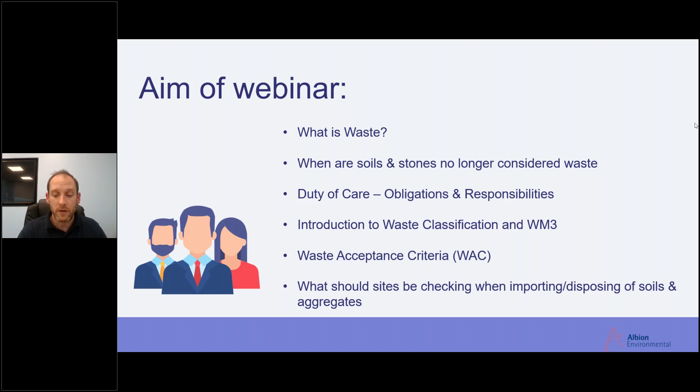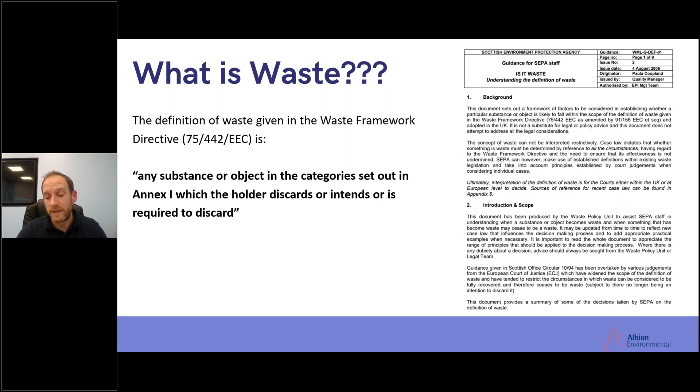So what is waste? If you're looking at the Waste Framework Directive, the definition is any substance or object in the categories set out in Annex 1, which the holder discards, intends to discard, or is required to discard. But quite simply, when we're looking at construction sites, if a groundwork contractor or developer needs to excavate material for cut and fill, for drainage, for foundation design, to get to formation level, and they can't incorporate it within the site so it needs to go off site, that material is going to be waste material.

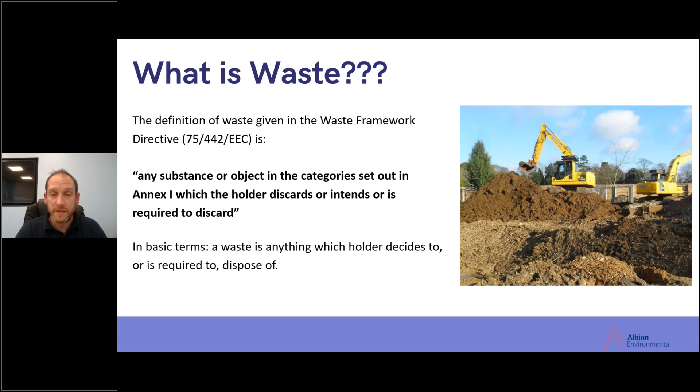So why might waste producers or those in industry think it's perhaps not waste? One reason we sometimes come across is people try to argue that the material's valuable - I've got some screened topsoil, for example, that's come off the site, and I know someone on another site who's crying out for this and would pay money for it.

There's value to it. Equally, you see waste contractors taking in mixed construction waste, or even just soils and stones, and then screening it and producing a screened topsoil. Again, they're looking at stockpiles of material and saying, well, it's got value to it, people are crying out for topsoil - why do I still have to consider it waste?

So we're going to touch on that. But I suppose while market demand might be one of the reasons why things aren't considered waste, it certainly wouldn't be the overall factor.

And whether it is non-polluting, or looks non-polluting - I say 'looks non-polluting' intentionally, because I've been involved on sites where, say, a demolition contractor has left a stockpile of demo material. It looks, to all intents and purposes, just like a pile of aggregate, and the contractor on that site or another site says, well, I can use that for my piling mat, it looks pretty clean. But again, that's not the overriding factor on whether something can be classed as waste or not.

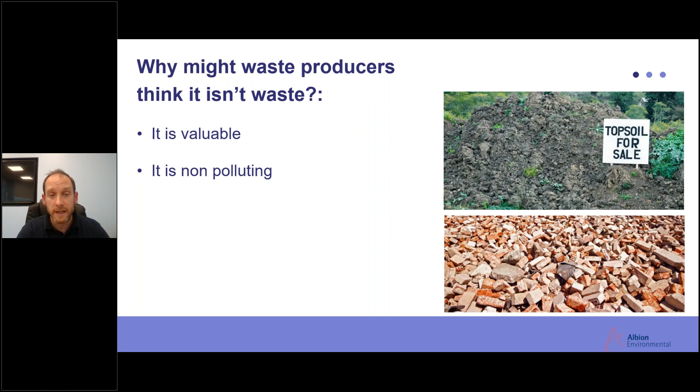Just because something looks non-polluting and there's value to it, doesn't mean that it's no longer considered waste. Even if that material, even if you're giving it on to someone else, or your client's giving it on to someone else, and they're going to reuse or recycle it, it's still legally considered to be waste. So if the person that produced it had to dispose of it, then that's still a waste material that you've passed on, and they are then handling.

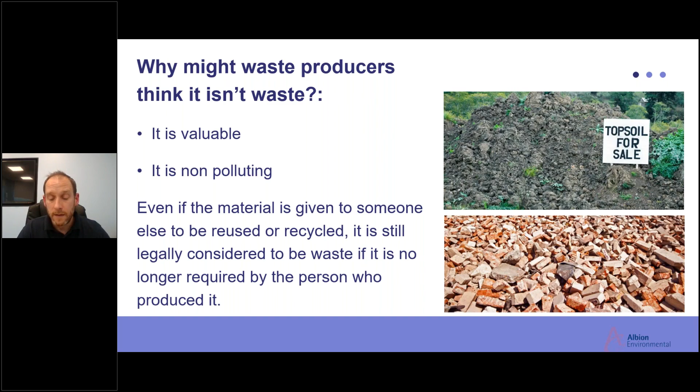So when would it no longer be considered waste? There are obviously examples of that. There's good aggregate and soil out there that we want to be reusing on developments.

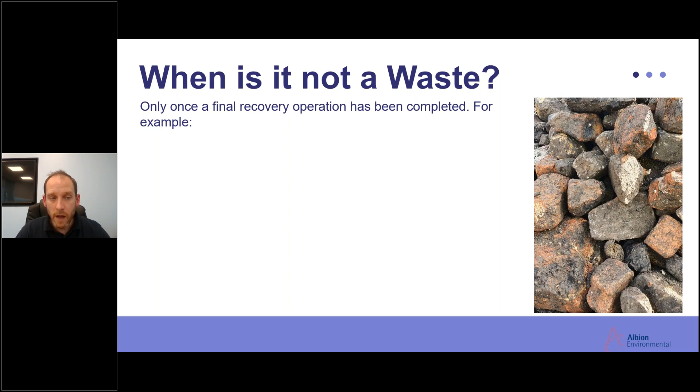The main definition really is once the final recovery operation has been completed. An example of that would be the aggregate protocol, which is the quality protocol for the production of aggregates from inert waste. So if that aggregate protocol is in place, if it's been developed for the site and produced to a particular standard - I've got a slide in a second that goes through that process in more detail - then it would no longer be considered waste.

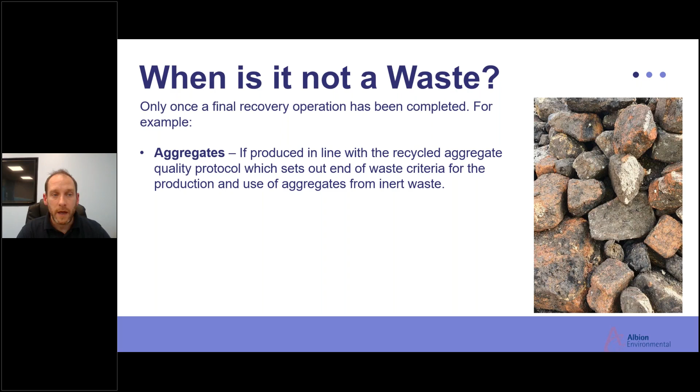And there are some other quality protocols out there, for example for compost as well. So there may be a quality protocol in place. There's also some other specific guidance, for example SEPA guidance on promoting the sustainable reuse of greenfield soils in construction. Again, if we're working on a greenfield site that's got a surplus of material that's been moved somewhere else, then potentially that will not be regulated under waste legislation, as long as it's handled in line with that regulatory guidance. I've got a slide which will go through that in a bit more detail.

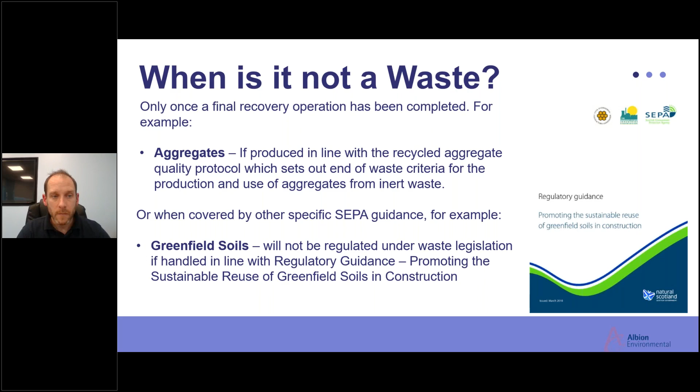To summarize that waste journey to an end of waste status, here's a brief example. We've got someone come along, a contractor that needs to dig up some soils and aggregates. They've got to be excavated as part of the earthworks. They can't be reused on site. There's an intent to discard, therefore it's waste.

It gets loaded up into the wagon and taken off to, hopefully, a recycling facility. Again, it's still waste during that process. It gets to recycling facilities - for example a soil wash plant or some other type of waste transfer station - where that material is going to be processed and hopefully turned into a product. But while it's undergoing that processing, it would still be considered waste.

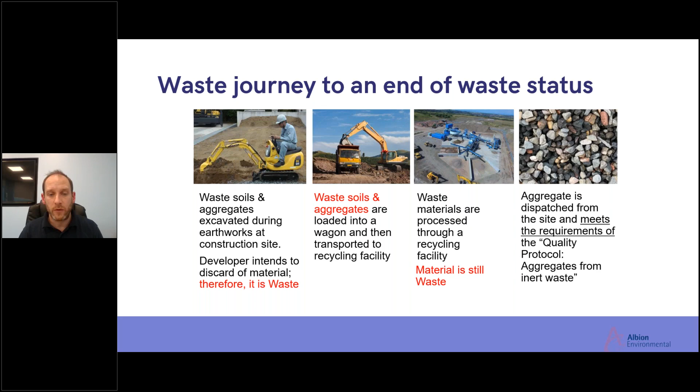Finally, you get to a point where you've got an aggregate which can be dispatched from site. It meets the requirements of the quality protocol, so it's achieved a particular standard - for example 6F5 or a bedding sand - and then it would no longer be considered waste. So you've got this whole section here, the first three boxes where we're looking at waste, and then the end, which is obviously the goal we're trying to get to, is where it's no longer considered waste anymore.

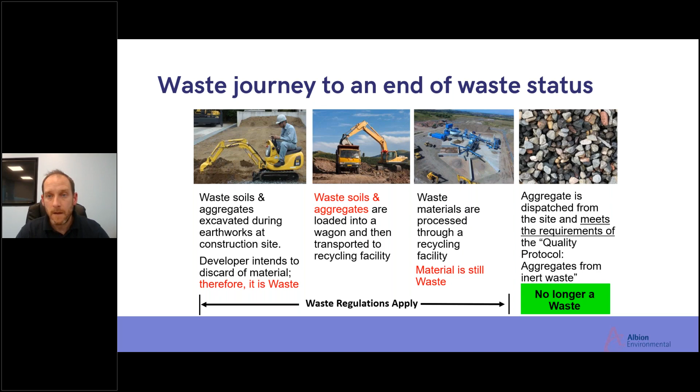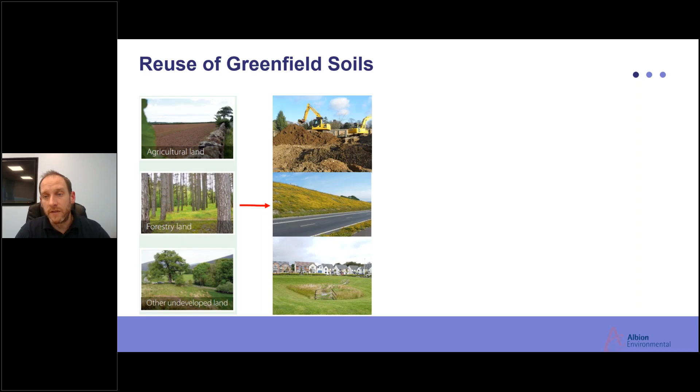We've also touched on briefly before, the reuse of greenfield soils. By greenfield sites, in accordance with the guidance document, we're looking at undeveloped land, forestry land, agricultural land. There's a series of uses within that guidance document - for example, another construction site redeveloped for housing or a commercial development, embankments for roadways, road verges maybe for screening or noise attenuation, and then within SUDS design as well.

Now, obviously, there are a few things you need to comply with to achieve compliance with this guidance. It's got to be greenfield and soil uncontaminated, so you're looking for some evidence that the material is actually greenfield. If it's a site that's been redeveloped, there will have been an SI produced at some point, so there should be some evidence there backing that up.

And there's also limits to the depths that this material can be placed at. So this is thinking about the receiving site. If you're excavating topsoil, for example, from a greenfield site, then that can be placed at a depth of 100 to 150 mil at the receiving site.

If it's the subsoils that you're excavating, then it's 300 to 450 mil depth, again at the receiving site. And I suppose what they're looking at there is that's a kind of fairly standard capping depth for landscaped areas on a lot of redevelopments.

You also need to, when you're placing the material, make sure it's within the agreed planning volumes and final finish levels of the development. So not just using it as an excuse to create unnecessary bunds and unnecessary amounts of material.

And obviously, again, it needs to be within that planning boundary. So again, it's not being used as an excuse just to dispose of material when it's creeping out with that red line boundary. And then lastly, there's a declaration of compliance form.

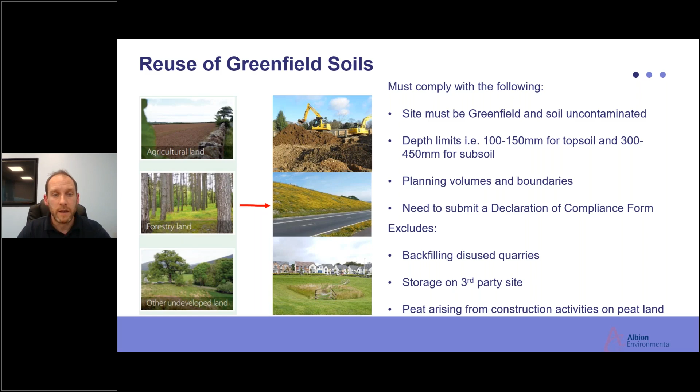And then lastly, peat arising from construction activities on peatland. SEPA's got a separate set of guidance for that activity, so again it wouldn't fall under this particular guidance.

Ideally, we're trying to keep this material on site. So there's also on-site reuse of excavated waste soils, which again, hopefully, then you're not necessarily having to worry about the waste legislation as such.

SEPA won't regulate under waste management controls as long as you've got the following criteria in place. The use has to be a necessary part of planned work. So basically what it's allowing you to do is move soils from one part of the site into another part of the site, but that has to be part of the planned works.

You can't suddenly create a bund, for example, for no apparent reason. There has to have been some sort of reason that there's upfill in a certain area of the site required. It needs to be suitable for that use - obviously it has to be geotechnically and environmentally suitable.

It shouldn't need any processing or treatment before it's used. If there was treatment required or some processing, then that's still possible, but someone would have had to come in with maybe a mobile plant license, for example.

You want to be making sure that no more than the quantity necessary is used. And again, it's making sure that it's not an excuse just to hide material and avoid disposal costs, because disposal costs are expensive.

So it is making sure that it's only going up to the agreed final finish levels at the site, that you've got a certainty of use and it's not just a mere possibility.

The situations you're trying to avoid there is where you've got maybe multiple phases of a development. The first phase creates a stockpile of surplus material and thinks, oh, it's okay because we could use that possibly across the latter phases, and then it works its way around the phases until you end up with a big stockpile at the end that the final phase has to deal with.

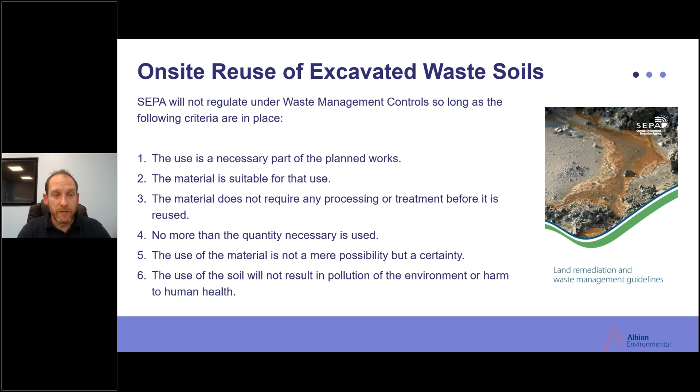So I've hopefully covered a bit of what is waste and when we need to think of it as waste, when maybe we can think of it as no longer being considered waste, or deal with the movement outside of waste legislation.

The other important thing is duty of care. I do some training on duty of care for ground workers, waste operators, waste producers, and a whole plethora of different people in that waste chain. I think it's sometimes a concept that's still not fully appreciated.

The key principle of duty of care is that it's everyone's responsibility and duty to ensure that waste is managed correctly and safely. So it's not just the waste carrier, the groundwork contractor, or the waste manager - it's the waste receiving site, the landfills, the recycling facility as well. Everyone in that whole chain has a responsibility to ensure it's managed correctly.

That includes your waste producers, waste managers, waste carriers, brokers, etc. And that's enshrined in law.

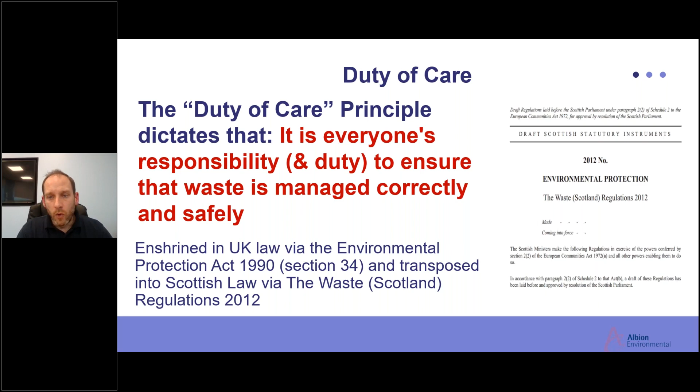So what are the obligations and responsibilities? I'll start with the waste producer. I think arguably they're the most important person in the chain - they're the ones responsible for producing the waste in the first place during the course of their activities. I think sometimes that is in danger of being forgotten.

Often I see site investigation reports or soil data being passed on to a landfill or a recycling facility like a soil wash plant or some screening operation, but it's just handed over as 'here's the investigation, here's the data.' What they don't know is where the waste is being generated, unless it's provided as well. Sometimes I see soil data on its own without any context of the history or material description.

So the waste receiver or waste manager can't be expected to understand what was the final cut and fill of the site. Okay, we've got a site investigation here, maybe there's an issue in trial pit 1 at 2 meters depth - but is anything actually coming from that location? Or maybe there's some horizons of made ground or an area of the site not tested, but waste is coming from that. That's information that would really come from those generating the waste and the design team involved.

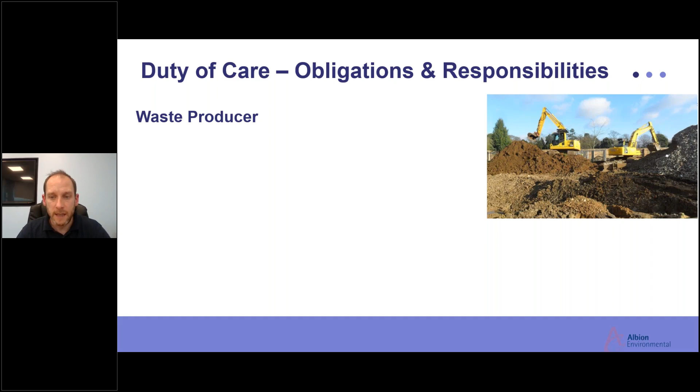So their responsibilities, firstly, is the waste hierarchy. I'm sure everyone's familiar with the waste hierarchy - there's loads of diagrams showing what it involves, but here's a fairly simple one. Firstly, producers should be looking to prevent waste in the first place. Is there any way the site can be designed so you're minimizing any cut actually coming off the site? Is there anything that can be done to remove waste in the first place?

Even with the best will in the world, there's normally going to be a requirement for things like caps, foundations, and drainage. But maybe there's something that can be done to reduce that volume - maybe some geotechnical solution that limits or reduces the amount of waste being generated.

Also look at whether there are options to reuse. Maybe the site's got some topsoil that could be reused if it's segregated appropriately and tested to confirm it's suitable. Maybe there's some deep excavations generating surplus subsoil that, if clean, segregated, and tested, could also be reused on site. If we've explored those avenues - I appreciate sites often may not have room to stockpile material to reuse.

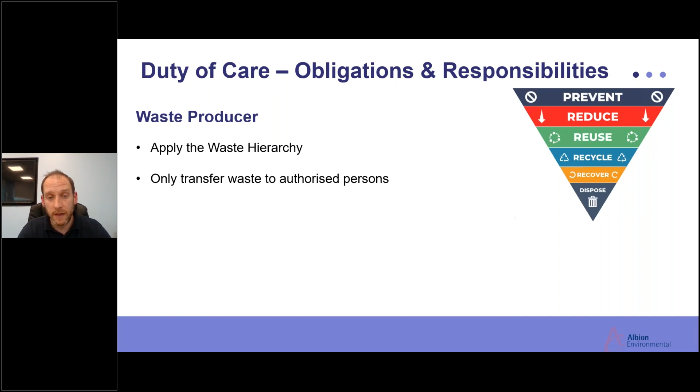You need to make sure that you're only transferring waste to authorised persons. So whoever's going to be the waste carrier, make sure they've got a waste carrier's license, and that's something that can be checked online. And that anyone it's going to has got an appropriate waste management license, exemption, or a PPC permit.

Again, these are all easy bits of information just to check - have you got this documentation in place - and they should be able to provide all that.

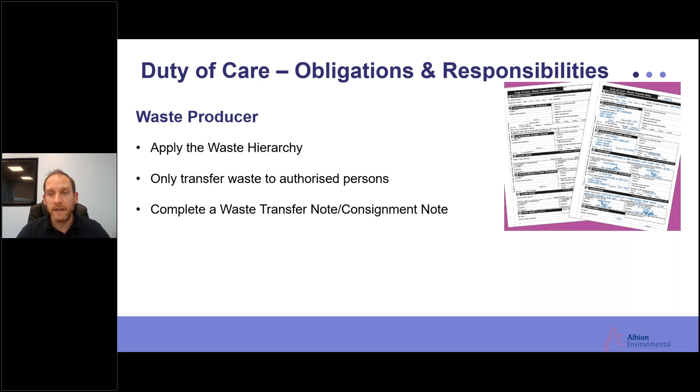As a producer, you need to complete a waste transfer note, for non-hazardous soils, or a consignment note, for hazardous material. And it's making sure that's been filled out correctly, and that it's been described appropriately. So examples we've seen in the past where someone's described the material as 'muck', for example, that's not an appropriate description. It doesn't tell people what's actually within the waste, how they would manage it, if there's any risks they need to be aware of.

And as part of the description, which leads into the waste classification section, you need to apply a European waste catalogue code to it as well. This is where WM3 guidance comes in, which helps you make that decision, which I'll touch on in a bit.

And then lastly, you want to prevent the escape of waste and prevent the waste causing any harm or pollution. So if it's asbestos contaminated soils, for example, is that going into sealed skips? Is it being sealed in some other way to prevent release? Avoiding stockpiling soils next to surface water courses, for example, where they could potentially get runoff and cause a pollution incident. Those are the sorts of things we're looking for.

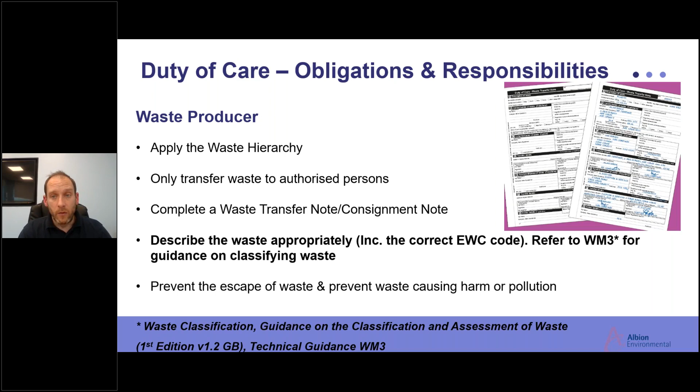As I say, there's other people in the waste chain as well. We've got collectors of the waste and waste managers as well. They've got much the same responsibilities in terms of applying the waste hierarchy and avoiding contamination, etc. But a couple of extra ones they need to be aware of.

As the waste collector turns up on site and is handed a waste transfer note, they should be checking that note to make sure it's been completed correctly before they accept it. And they obviously also need to be registered to carry waste with SEPA.

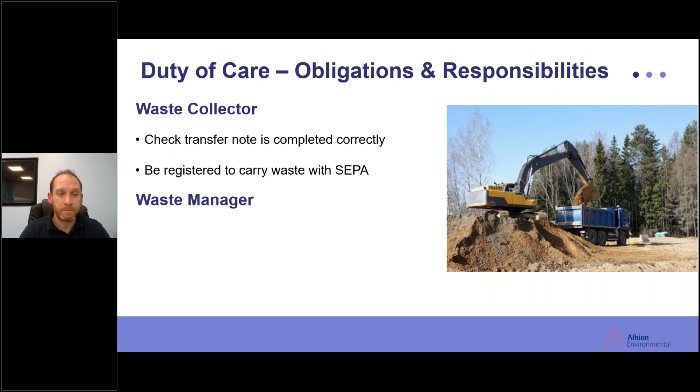Then the waste manager - again they've got a few extra things to be aware of. If you, as a site, like a construction site, are accepting waste onto the site and you've got an exemption in place, then technically you're accepting waste, so you would be a waste manager. You need to make sure you've got the appropriate exemption in place. We always think of the waste manager as, oh, that must be the landfill site, but if you're accepting waste under an exemption, then technically you could fall under that description as well, or whoever's operating the site.

And then lastly, the other thing to be aware of is ensuring that the waste they receive is accurate and contains all the information necessary for safe handling, treatment, and disposal. I appreciate a lot of this is ideal world scenarios - sometimes there's commercial decisions that go on, and this isn't always followed as closely as it should be. But this is what duty of care stipulates.

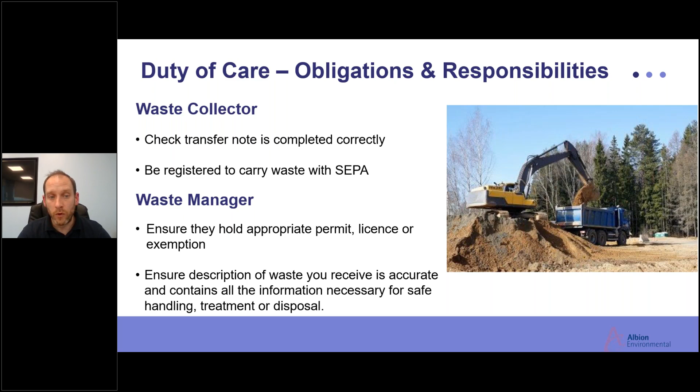So that's kind of a run through of duty of care, and I'll bring that up in the summary at the end. Then I wanted to move on to giving a brief introduction into waste classification and what waste classification is.

Now, waste classification is different to risk assessment. It's a completely different way of looking at the soil data that we look at through site investigation reports. During a waste classification assessment, we're identifying whether a waste displays hazardous properties or not, and whether they're above their relevant threshold, which then determines how waste should be handled, treated, and disposed of.

The types of hazardous properties we're looking at - bear in mind this is relevant to all waste types produced, from household waste collected to various types of industries and commercial collections. So it's not just soil and stone, it's covering a whole plethora of waste types. But the hazards we're looking at are whether the waste is explosive, flammable, toxic, carcinogenic, ecotoxic, and whether it contains any persistent organic pollutants.

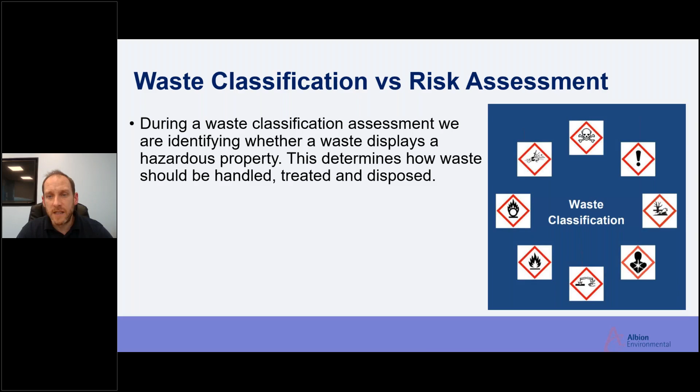The ones most commonly come across with waste soils are things that are maybe carcinogenic or ecotoxic, and depending on the site, persistent organic pollutants as well. This is different to risk assessment - with risk assessment, we determine the probability of harm occurring as a result of exposure to contaminants, using that source pathway receptor model. I think waste classification is sometimes added on as a bit of a tag on, but it is a completely different type of assessment that needs to be looked at slightly differently.

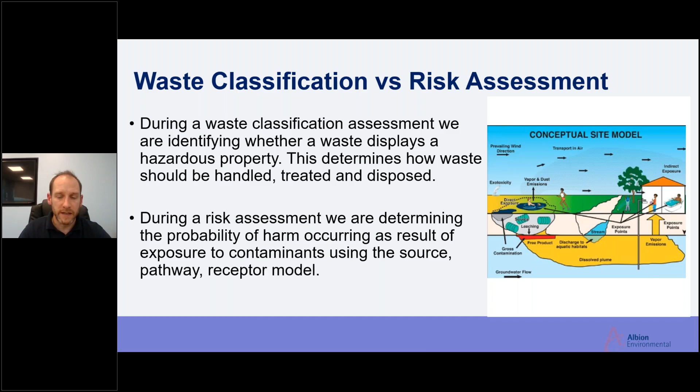So why is it important? Why should we spend time looking at this and giving it consideration? Well, firstly, it's a legal requirement to do it, and the producer could face potential liability if the waste isn't handled or it's deposited somewhere incorrectly. So it's something that we need to do and take due consideration of.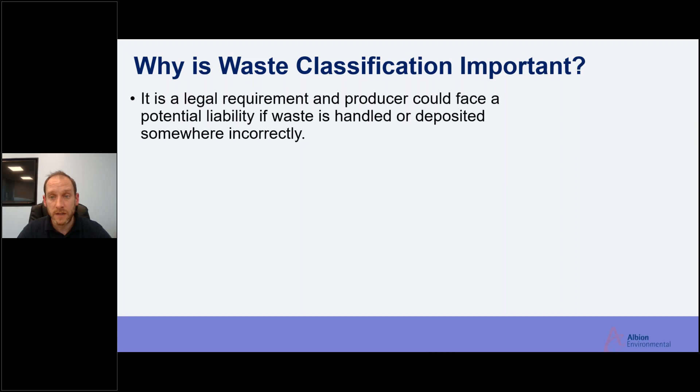It's helping to ensure waste is safely handled and disposed of. We're looking at a site, but then that material is being passed on to carriers, operators of landfill, operators of waste transfer stations and wash plants. We've got their own set of operatives that are handling and dealing with the material. So if we've got contaminants or hazards within the waste that we're passing on to people, we've got a duty to make sure that they're fully aware of what any potential hazards may be, so that they can safely handle it and dispose of it correctly.

It's also something that's required by the waste operators. A waste operator who has a waste management license facility or a PPC permitted facility or an exemption will have a set of waste codes that they can accept onto their site. And they need to be able to demonstrate to SEPA as the regulator that they've only accepted those waste types. They need to fill out waste returns. They need to go back to SEPA. They need to be able to demonstrate that they're only following the conditions of their license or their permit. And that information then goes on to SEPA, and that information is being used to develop government policy and national reporting to inform decisions on new waste infrastructure. So it's important that we get that information correct.

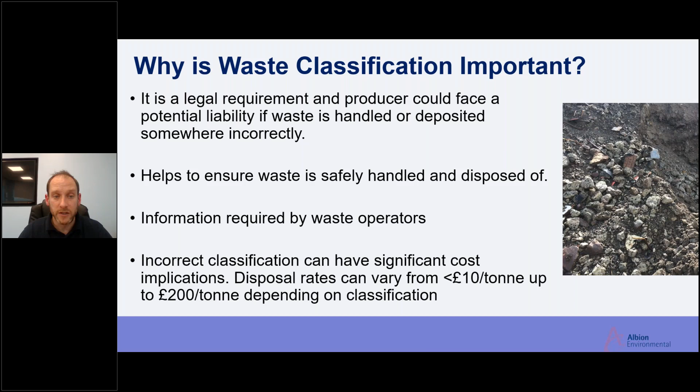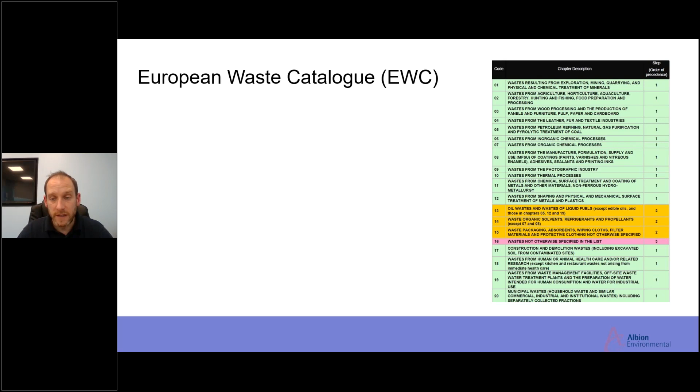So as I mentioned, part of getting that description right is getting the correct EWC codes, the European Waste Catalogue Code. So what is that? Well, it's a non-exhaustive list. It's a series of waste types that was established by the European Commission, and it differentiates hazardous and non-hazardous waste. And that's quite an important point.

I think you may often see on bills of quantities, for example, or discussions with developers and contractors, they maybe talk about inert, non-hazardous and hazardous. When it comes to waste classification, there are effectively two types of waste, often lots of waste types, but two types in as much as they're either hazardous or they're non-hazardous.

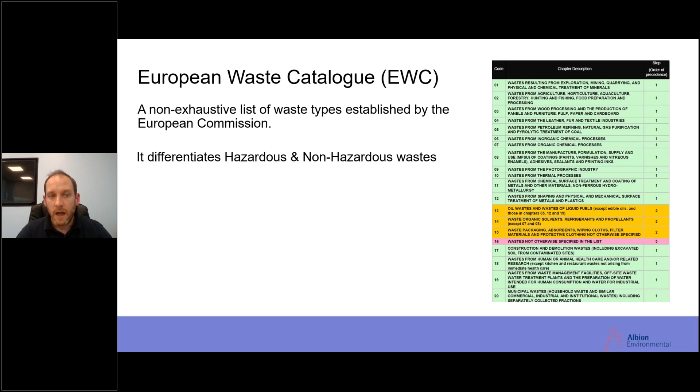The European Waste Catalogue is broken down into 20 chapters, and most of them are industry-based, so all the green ones you can see on the screen at the moment are industry-based. So, things like waste from the agricultural industry, from wood processing, etc. And the one that those of us working in the construction industry most often deal with is 17, which is construction and demolition waste, which includes excavated soil from contaminated sites. So that's the most common one, but you may also come across 19 codes, which come from waste management facilities. So if you're receiving soil maybe from a waste management facility or some other material type, aggregates for example, then you may encounter 19 codes as well.

And then that is broken down. So from those 20 chapters, they then have sub-chapters, and then to get the 6-digit code, the final 2 digits are specific to the waste type.

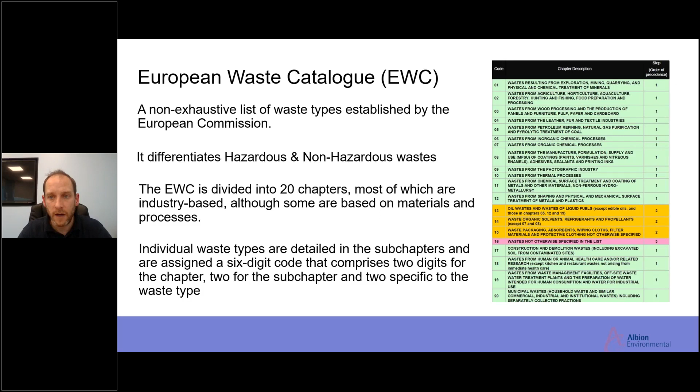And just to help visualize that, here we've got a pile of soil. It's been classified as 170504. So where does that come from? Well, the 17, the waste has arisen from a demolition site, so it's covered under chapter 17. That general description, so the subchapter will be waste, soil and stones, so that's where 05 comes from as subchapter. And then finally, it's identified by the digits 04, which means that the soil doesn't contain any hazardous substances. So this is non-haz soil and stones.

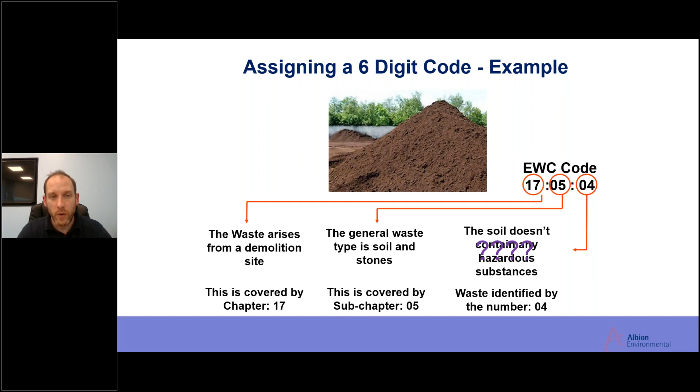But I suppose the question really, and this is the whole point of what you look at with waste classification, is, well, how do you know that? How do you know it doesn't contain any hazardous substances? Which is where WM3 comes in.

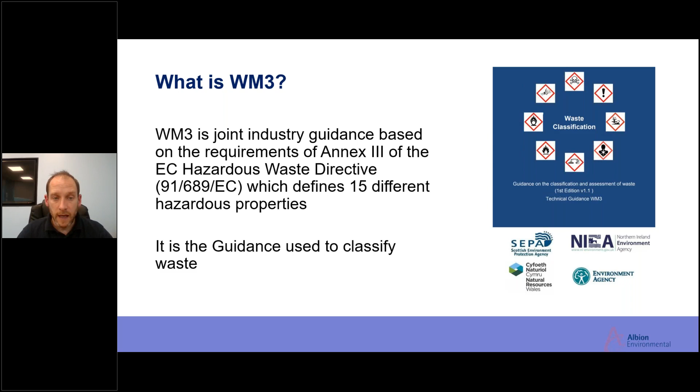So WM3 is a joint industry guidance document, and it outlines the 15 different hazardous properties. It's the guidance used to classify waste, and there are 4 kinds of entry types within that: absolute hazards, absolute non-hazards, and then mirror hazardous and mirror non-hazardous.

So the absolute hazards are things like 170303, coal tar and tar products. It's always hazardous - if you're dealing with it, it's a hazardous product, or hazardous waste. So that's kind of the end of the assessment.

Then you've got absolute non-hazardous, so maybe separately collected paper and card. It's not hazardous material, so it would be an absolute non-hazardous, and you don't need to go and do further assessments on it.

And then the mirror entries, which would be maybe familiar with soil and stones. We've got the hazardous mirror entry for soils, which is 170503, and then the non-hazardous entry, 170504.

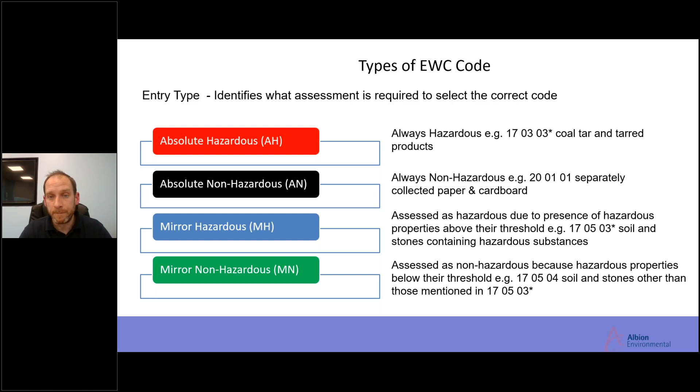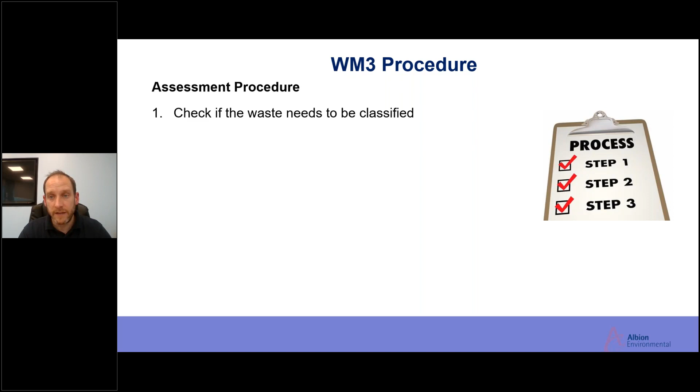That whole procedure and WM3 assessment is well, several topics all on its own, but a brief outline of that procedure is, well, first you need to check if the waste needs to be classified. Most of the waste that we deal with will be. There are certain special types of waste which won't be - radioactive waste, for example, has its own guidance.

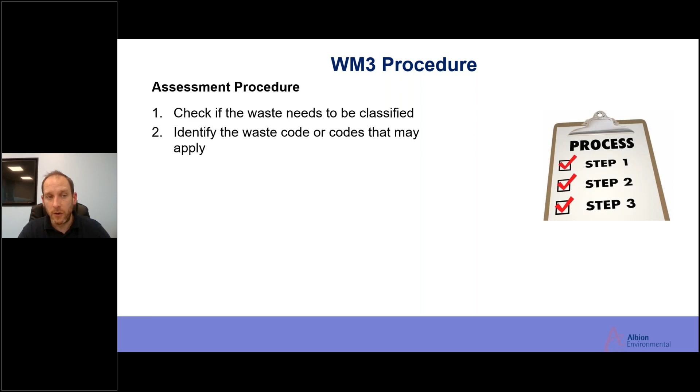We need to identify the waste code or codes that may apply. So, for example, with soil and stones, we're looking at the 17 05 04 or 17 05 03* - there are 2 waste codes that could apply. We need to look at what assessment is needed to select which code is correct.

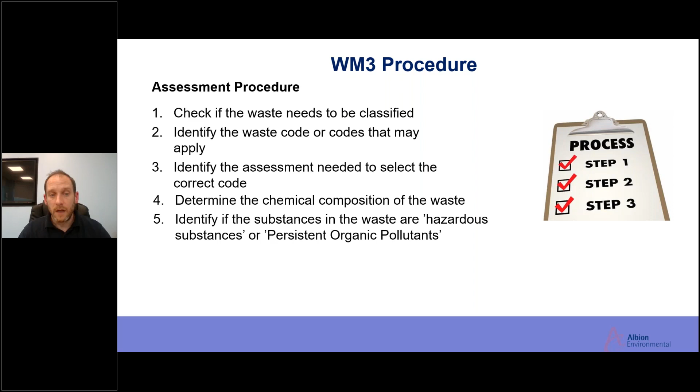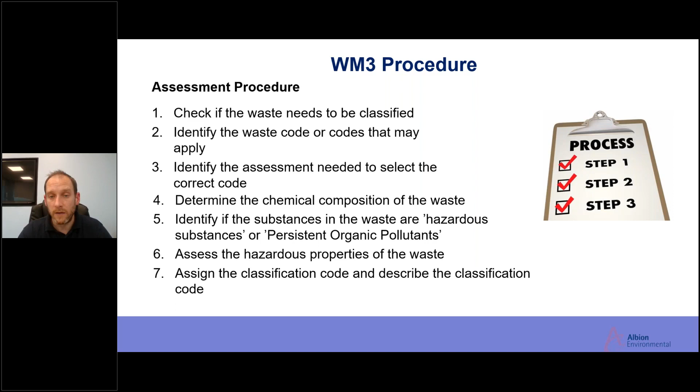Determine the chemical composition of the waste, where your sampling comes in. Identify from that sample results whether the waste is hazardous or contains hazardous substances or any persistent organic pollutants. Look at and assess those hazardous properties, see if they're above a threshold, and then finally assign the code and describe the classification code with any duty of care, transfer notes or consignment notes.

So how do you find out the waste composition and assess these mirror entries? Well, in a nice scenario, you'd have a manufacturer safety data sheet, which would outline the hazards within it.

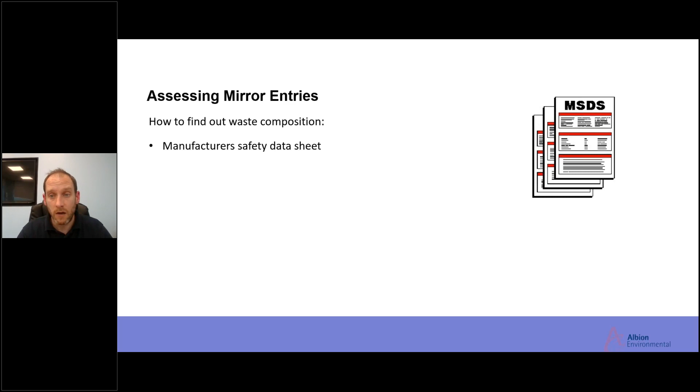Obviously, we don't generally get that with soil and stones, unfortunately, unless maybe you had a spill of something - a known product or waste. So it means that we need to fall into looking at the sample and analysis data to try and work out its composition.

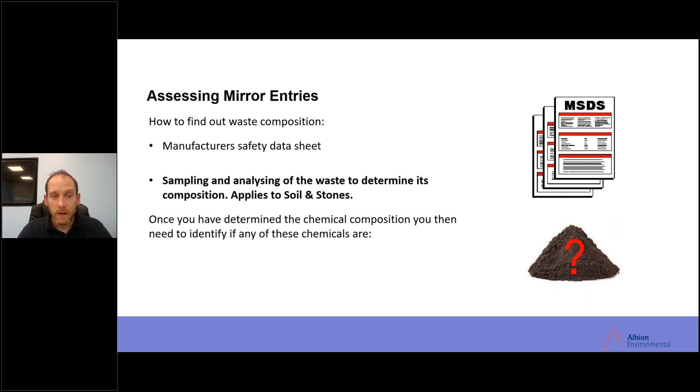And once you've determined its composition, then you need to identify if any of these chemicals are hazardous substances or persistent organic pollutants. So there's a few challenges when you're looking at soil and stones - like I say, it's not as easy as just getting a material safety data sheet.

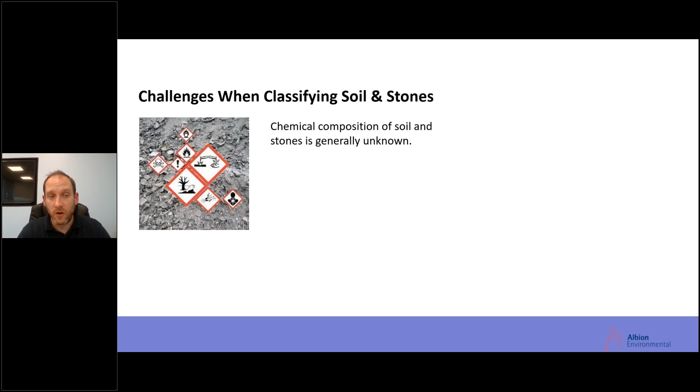So that chemical composition of the soil is generally unknown. We've got to rely on soil sampling data, and how representative that type of soil is to the wagon load of material that's been excavated from the site.

If that sampling data has come from the initial SI, which was being done primarily for a contaminated land reason or for planning purposes, does that reflect the material that's being excavated? Because the foundation design, the cut and fill may have changed since those samples were taken.

Does it represent that? And also an important point is that WM3 assessment and the soil analysis suite will depend on the site history - much the same as risk assessment, obviously that's something we're looking at as well.

But, you know, I've seen it from some people that are looking to dispose of maybe a stockpile of something, and they go to a lab and say, well, can I get a WM3 test? And that's, again, it's not like an off-the-shelf test as opposed to WAC, for example - it's not an off-the-shelf one with a set list of parameters.

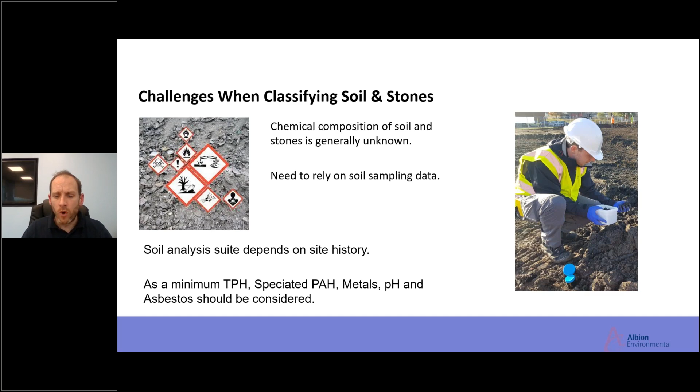You should be looking at what is the history of the material and what contaminants could potentially be there. So again, this is one of the reasons, or one of the areas where it differs from risk assessment - not all hazardous properties are based on single contaminant thresholds.

Some of the contaminants act cumulatively. So what I mean by how that's different is where you've got generic assessment criteria for arsenic and lead, nickel, etc. - those are the sort of values you're generally looking at, and you're looking at them in isolation.

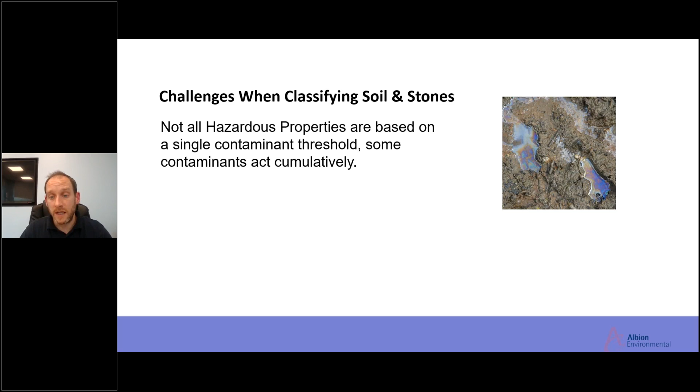Within waste classification, some of those parameters and contaminants can actually act cumulatively, so it's not as straightforward as having just a single value as such. And the other thing is that the soil analytical data will just give us a concentration of the metals, but it doesn't tell us what form that metal is present as.

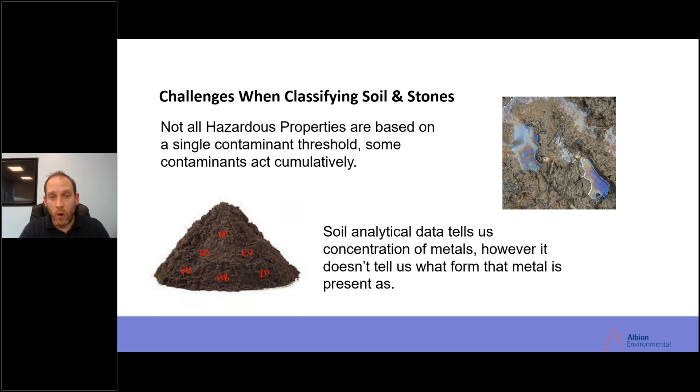Obviously we're not sitting with a stockpile of soil with a lump of arsenic and nickel and lead inside it. It's going to form some sort of species within the waste, depending how it's oxidized, etc. So that's what we're looking at, and that information doesn't come from a standard environmental lab.

I'm not going to go through this bit in too much detail, but just to give a little example of that kind of classification process. So, for example, you've got zinc. It's been identified at a concentration of 400 milligrams per kilogram. But what we don't know is what it's there present as. So that means we need to make some decisions.

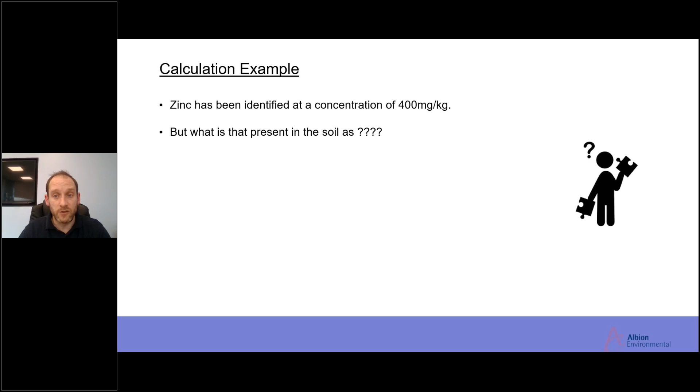We need to think, well, what's the worst case scenario? Or based on the history of the site, what is it most likely to be there as? And in the absence of that, maybe it's a residential site where we know there's been material imported, but there's no records to say where from. We maybe need to make some worst case scenario decisions. And so a worst case scenario would maybe be zinc chromate.

And this is where the chemistry comes into play. We're looking at, well, okay, what's the atomic weight of zinc? What's then the molecular weight of chromate? What's the molecular weight of zinc chromate? And once we've calculated that, we can then look at, right, okay, well, if we've got 400 milligrams of zinc, how much zinc chromate could that create, for example?

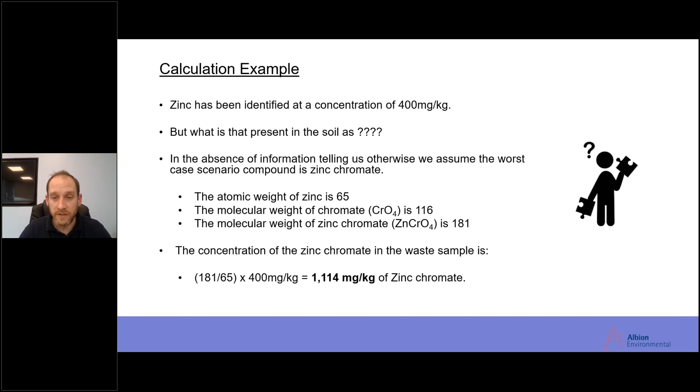And once we've figured that much out, we would then need to go, right, okay, well, what hazardous properties does zinc chromate actually have? Have any of those individual hazardous thresholds been exceeded? Are there then any cumulative hazardous thresholds with any other contaminants we've got within the waste?

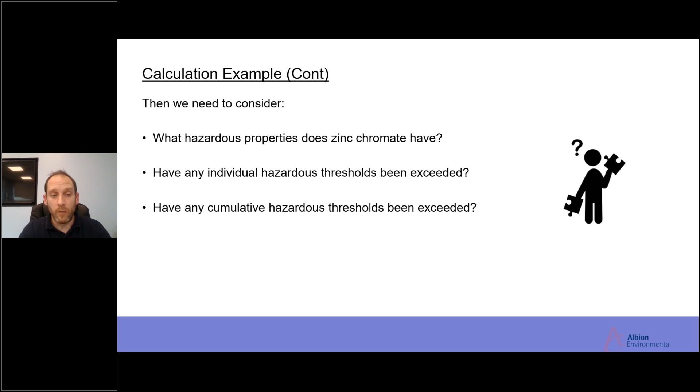If there is any sort of issues there, maybe we could discount some of the worst case scenarios. Maybe we've done some hexavalent chromium testing, for example, and so we know that that can't form. Or maybe there is something in the history that we can rule out certain things. And then we go from doing that to having to repeat it and look at all the chemical results that we've got. And you can see why tools such as HazWasteOnline are generally used, because obviously it takes a lot of that away and does those calculations for us.

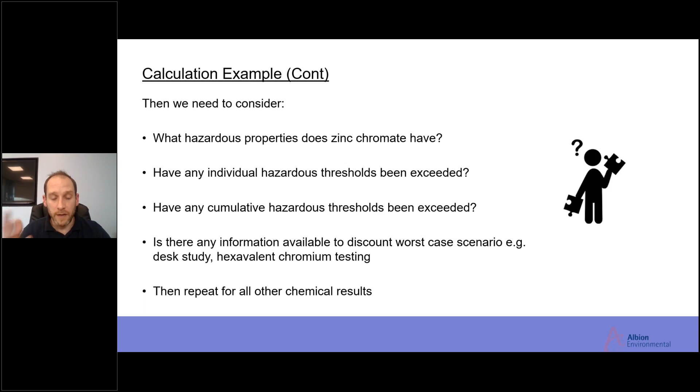So what about WAC? Well, WAC's generally simpler. It is a set test. You just ask for a WAC test and you get a WAC test generally. Sometimes they will ask you if you just want the inert version or hazardous, but generally if you ask for a WAC, that's what you get. So it's reasonably straightforward, and it is set criteria within it.

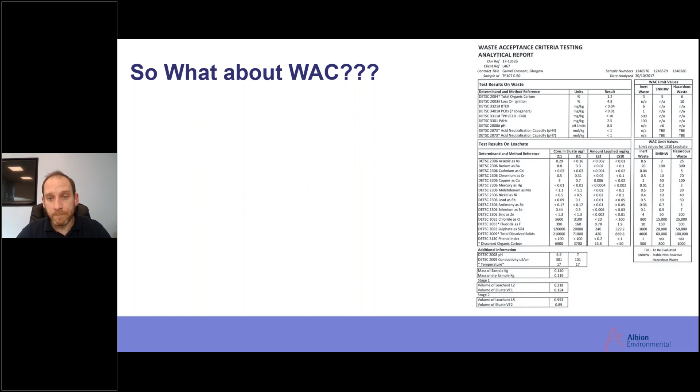But the key point, and I know this is often pointed out, is that it shouldn't be used for waste classification purposes. It doesn't include a full suite of tests. It doesn't include asbestos, for example. There's no solid metals in it. Depending which lab you've used, the TPH may not cover the full range that's needed for waste classification. So it doesn't include everything that's needed to make that assessment just because of that fixed criteria.

And it's not what WAC was ultimately designed for. WAC is a waste acceptance test for certain classes of landfill. And that sentence there, certain classes of landfill, is important because it's not all classes of landfill. It's designed for inert landfills and hazardous landfills, but also you may have some hazardous waste that's a stable, non-reactive hazardous waste, maybe something like asbestos.

It will be hazardous if it's above 0.1%, but it's quite stable, it's not going to leach. And you can have non-hazardous landfills that have got a designated cell to take some stable, non-reactive hazardous waste into that cell. But there is no WAC criteria for a non-hazardous landfill.

So you could look at some of the criteria here. For example, like PAHs, the inert criteria there is 100. So if you've got some non-hazardous waste, but actually you've got PAHs above 100, there's no point doing WAC because you already know it's going to fail WAC anyway because you don't meet it for that.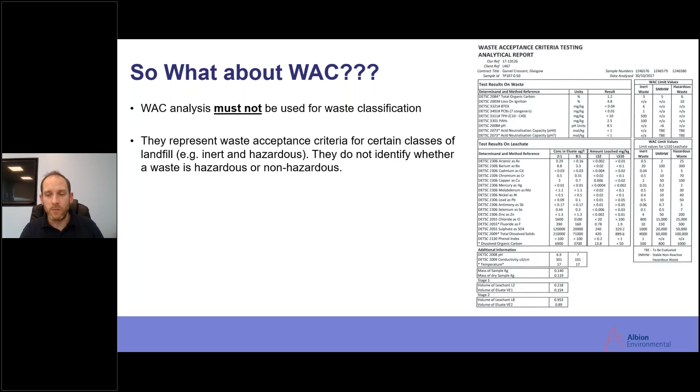they're limits that can be accepted by the landfill. They're not limits that, when exceeded, make it a particular waste. For example, I've seen people look at the hazardous waste criteria before, that final column, and they've seen elevated total organic carbon, and they go, okay, that's failed hazardous waste, that means we're dealing with hazardous waste. That's not how this works. That assessment of whether it's non-hazardous or hazardous comes from the WM3 assessment. This is just criteria. You need to be below those limits to get into certain classes of landfill.

So it's an important distinction. It's designed to analyze the leaching ability of contaminants in the soil and how they will act in the landfill environment. As I said, firstly it needs to undergo a WM3 assessment, and then, depending on the disposal route, it might need to undergo WAC testing.

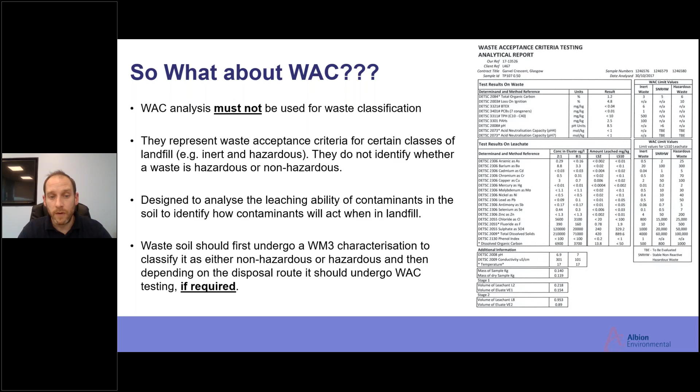But landfill is only one option. It could go to a soil washing facility potentially, another type of waste transfer station, or some other recycling operation. And maybe they don't need WAC as part of their acceptance criteria. So it shouldn't be the default to go to, because depending on the disposal route, it may not be required. So what are some of the issues then?

So we're getting site investigation data through, what are some of the contractors being faced with, what are they having to look at. We're looking at an SI that's been designed for contaminated land purposes and for planning, etc. What are some of the pitfalls that we need to look for? We'll need to look at the logs. Is there evidence of hydrocarbons, asbestos containing materials, etc.? And have they been sampled?

And do they include the material that's actually going to be excavated? For example, here maybe these layers of made ground have been analysed and found to be hazardous, but what about the material? We've got a layer of concrete that could potentially be segregated and disposed of at a cheaper rate. If there's deep excavations going on, there's another layer of made ground underneath - has that been tested? Is that also hazardous? Now, within this particular one, it does say hydrocarbon odours noted, so it could well be, but obviously unless you test that, you don't know for sure.

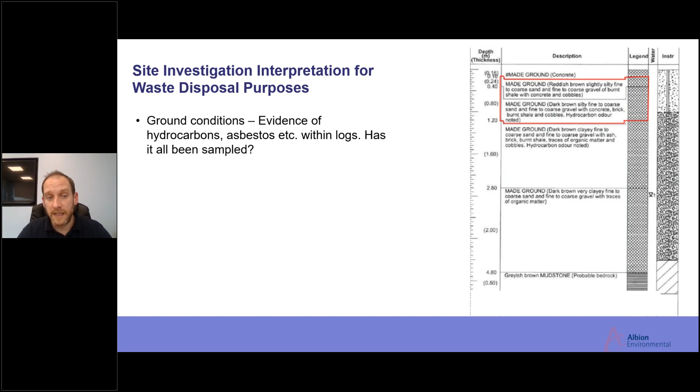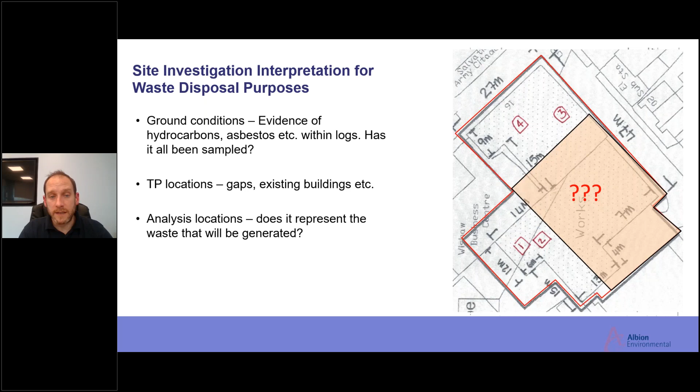So making sure that the material that you're excavating has been analysed. Forgive the crudeness of the plan, but looking at the trial pit locations, are there any gaps? Is there an area of the site that hasn't been analysed? Well, there may be good reason - maybe there's a building, services, etc. But if material is going to be excavated from there, then some follow-up work's needed. And does it represent the waste that's going to be generated?

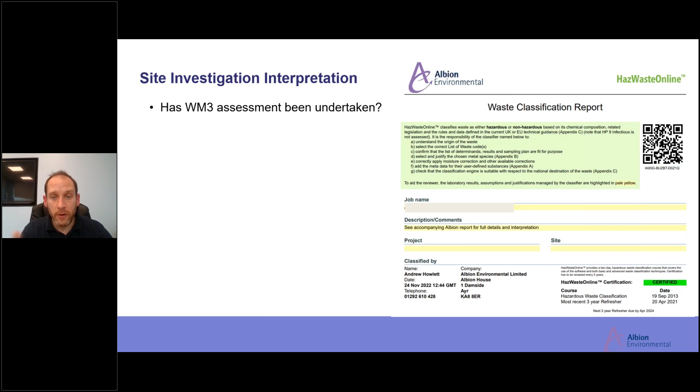We'll want to be looking at has a WM3 assessment been undertaken? This is a HazWasteOnline output. Is there something like this contained within the report? Has it been considered? And if it has been included, have they assessed and looked at all the samples within the report? Here's one - it was just trial pit 3, 10, 11, and 18. You would assume there's lots of numbers in between that. What's happened to those samples? Why haven't they been assessed or considered? So it's looking at those things, making sure that everything has been looked at, certainly relative to what's going off the site.

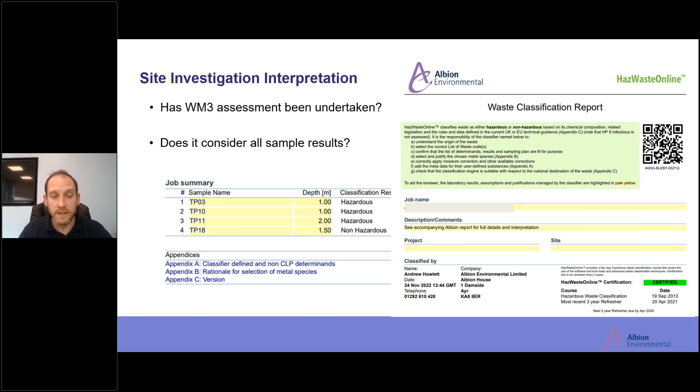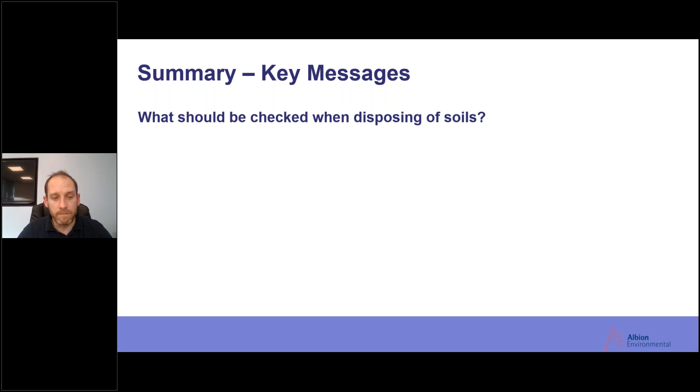So to wrap up and bring it to a close, I just briefly want to go over some of the key messages and things that should be looked at when disposing of soils.

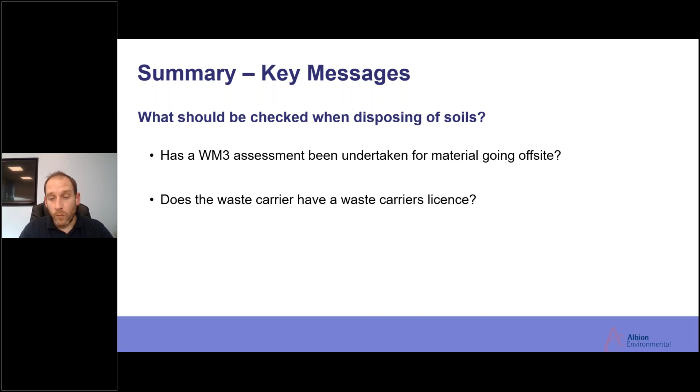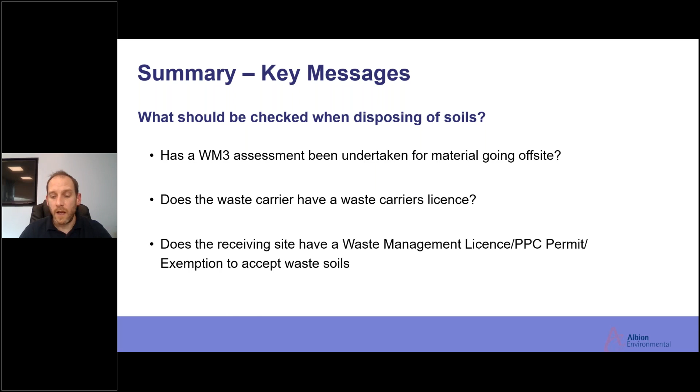Has the WM3 assessment been undertaken for the material going off site? Does the waste carrier have a waste carrier's license? And does the receiving site have a waste management license, PPC permit, or exemption to accept those waste soils? And again, these are all really easy things to check, and if you ask these questions, they should be able to provide it.

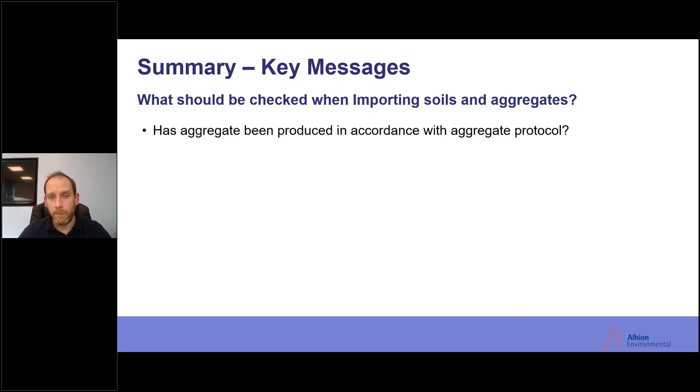Now, if we're importing material, equally, what should be checked when we're importing soils and aggregates? Has aggregate been produced in accordance with an aggregate protocol? If you're importing aggregates from a supplier, is this recycled aggregate? If it is, is there an aggregate protocol for that in place? And again, they should be able to have a statement to confirm that, and also the testing certificates to back that up.

If it's coming from a greenfield site, can they evidence that? A number of times I've been told it's a greenfield site, asked for some evidence, and I've just got an email back saying yes, it's from a greenfield site. That's unlikely to be sufficient evidence if it's asked for by SEPA or the local authority as part of a validation report. It's information that the supplier should have. If it's a greenfield site, someone must have done a site investigation for it, and should be able to provide a declaration of compliance. It's not a difficult form, it should be easy to supply.

And if the above don't apply, and you are receiving what would be classed as waste soils or aggregates, if it's non-compliant with an aggregate protocol, has the site that's receiving it got a waste management license exemption in place? Has that been applied for with SEPA? And then lastly, is that material suitable for use, making sure that it's geotechnically and environmentally suitable.

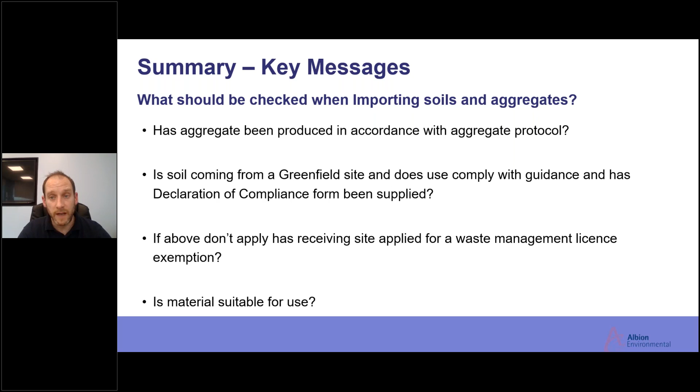So that brings us to an end of everything I wanted to cover this afternoon. I hope you found that of interest and some bits in there that might have been useful. If you have any questions or comments, happy to take a few now, or happy for my contact details to be shared and follow up on the back of this. Thank you very much.